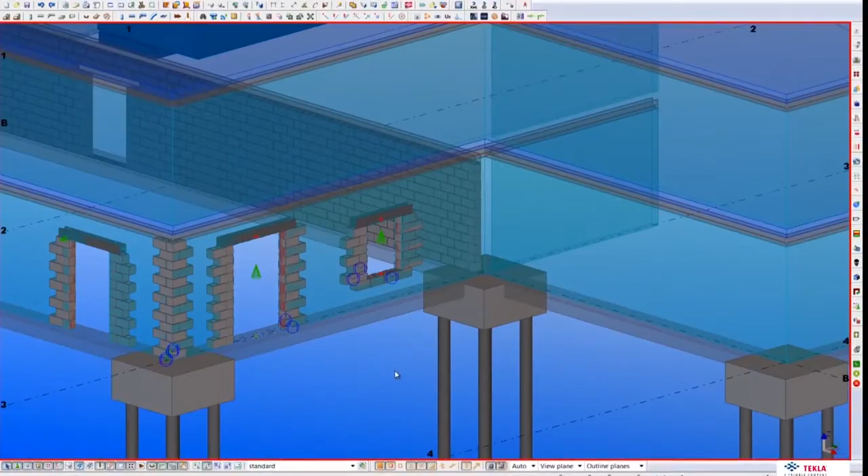What is BIM? BIM's the buzzword that was picked up in around 2003 as the new name for something that would really be innovative in the construction industry. At the beginning of the era of computer-aided design, there was this debate whether we were developing techniques for producing drawings better or producing the model of the object that's being fabricated and implemented.

And it took the construction industry much longer than other industries to make that change to modeling the product rather than modeling drawings, modeling an artificial representation. So it wasn't until about 2003 that the industry as a whole recognized the value of 3D modeling of the object and the building from that object and carrying all the attributes and information of those objects.

They named it BIM. Other industries called it virtual design and construction. It's been going on for 20 years in the aerospace and manufacturing industries. But Autodesk's purchase of Revit gave credibility by the leading CAD vendor that this was a direction for the future, and the adoption has been very fast.

So Chuck has talked to you about the history of building information modeling and how it's taking hold in the structural steel and precast concrete industries. And as you know, we're working with a lot of the masonry industry trade associations and companies in masonry with architects and structural engineers to develop BIM for masonry. And that entails a number of projects that you should be aware of.

The first of these projects is with masonry material suppliers. And one of the huge problems with the masonry industry is that it offers a wide range of products across the clay masonry, concrete masonry, and custom masonry like cast stone and cut stone products. And none of these are represented in a common way. So you can imagine in a BIM system, sometimes we see these objects in BIM systems as simply blobs that don't have any attribute data.

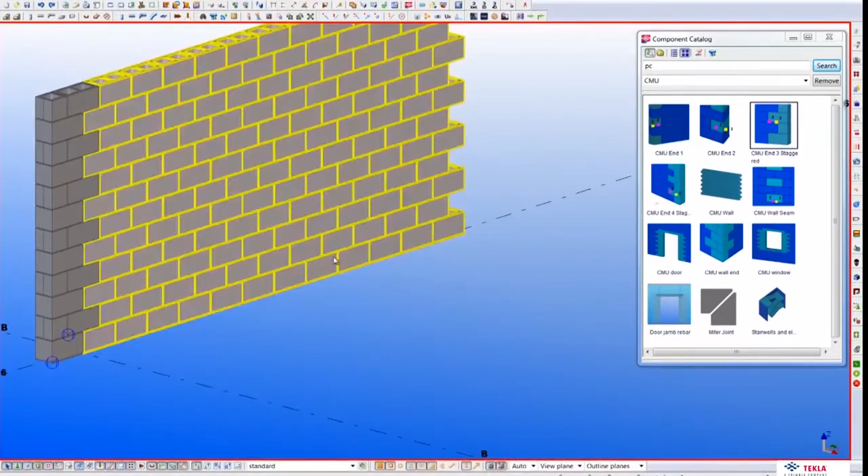So there's no way to query the drawings. There's no way for the models to really understand that there's masonry in these buildings because we don't have a common data infrastructure for the masonry units themselves. So that's our first project for the industry, is to develop this, what we call the masonry unit model database.

The ability to integrate all the different trades and systems into a single integrated model, that's a complicated story, but it's very critical. That's a central thing that contractors do, and it's facing the work in the construction site every day. So coordination, spatial coordination, time coordination,

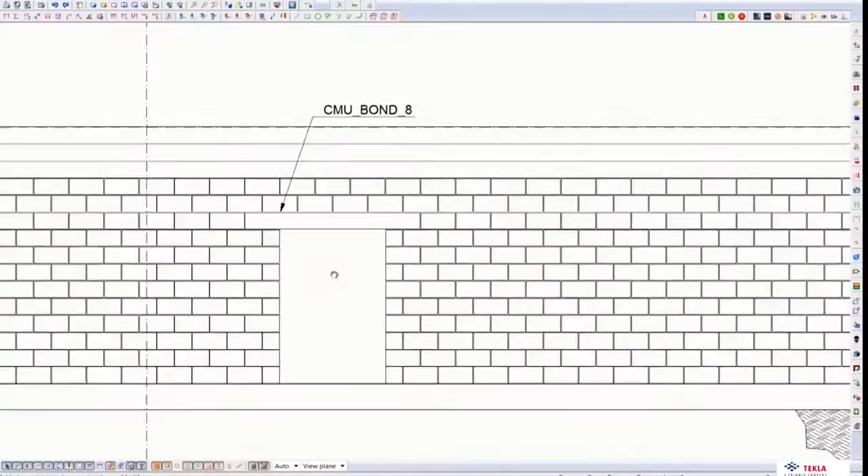tracking materials, material supplies. All of these things are facilitated by building information modeling, and as the rest of the industries move forward on this, then it's really incumbent on all the industries that are coordinating, working together to do that too.

20 years from now, we're going to see a really huge transformation of the construction industry, and especially what happens on a construction site. We're going to see a variety of augmentations for supply line, from deliveries, automation in terms of scheduling and adaptability, new kinds of technologies in terms of materials and how they're placed and formed, so that BIM really facilitates and allows all this to happen.

Part of what we're doing in the BIM for Masonry project is imagining a future state and imagining how software has to get better to get us there. And we really have to be able to represent all aspects of masonry, all of the masonry units, the wall systems, the details, the flow of materials on the job site from the manufacturers through the delivery chain in order to make the future state masonry BIM possible.

And Chuck talked about augmentation and the actual use of BIM on the job site. So you can imagine masons themselves having access to information about where the materials are, perhaps automation in terms of cutting of units, which we know is a difficult activity for masons to accomplish safely with OSHA standards for breathing silicates and things like this.

For a contractor to turn their back on BIM is to not look ahead to the future, because BIM is the future, and with architecture, 3D modeling, it is happening in the field today, and it will be prevalent in the very near future in our industry. And you have to be prepared to utilize the tools that are given us.

When I think about BIM and what the future holds, I'm excited because I'm not sure what all is available. I've utilized BIM on one project in the last 20 years, and what we were able to do with it, and that was when it was in its infancy, was amazing.

I can't imagine what we're going to be able to do 5 years from now with the BIM models, as far as logistics, and as far as assisting us in laying out a building, as far as assisting us in the amount of materials required. I mean, it's really amazing what's going to happen in the future.

I think the most important aspect of the BIM Coalition is giving the architects the tools to design more masonry within those systems. If we don't step up and supply this information to the architects and designers, we're going to sit and watch our industry become passé. We have to be the leader in BIM. We have to give the architects and designers the tools necessary to utilize our superior products.

Well, I think we're at a very interesting stage in the construction industry. I think the combination of digital, technological, and economic change is coming at us all at the same time, and it's very important that we raise the level of performance of both our employers, contractors, and our members, everybody involved in the industry, and take it all to a whole other level.

Well, I think if we leave it to architects and engineers and owners to design the whole process, and we don't engage in it, we won't get what we need out of the process. It's important that we raise our game, develop our own versions of BIM to interact with the other players in the construction industry, so as we can get to market at the same time or ahead of everybody else and lead the masonry process, instead of having other factors in the construction industry lead us around or exclude us, as the case may be.

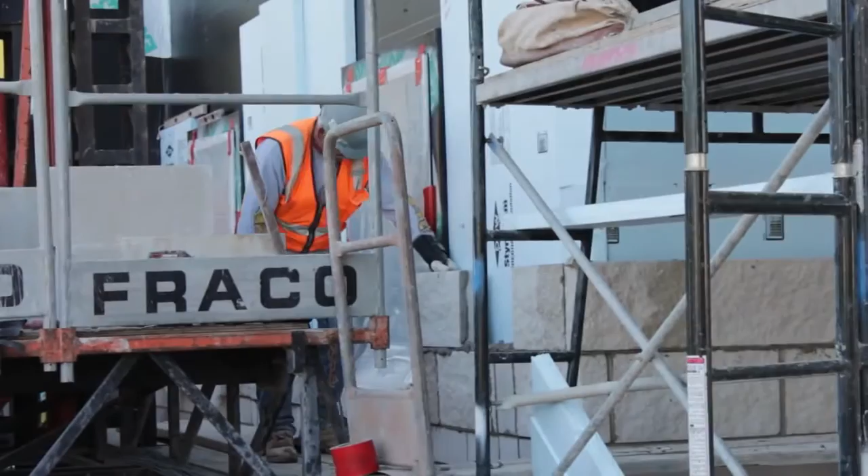Well, when I was a young bricklayer, I used to say to watch good bricklayers work for a good masonry contractor was like poetry in motion. I would like us to be able to continue at that level, and when we've gone through this process, people can believe it's a joy to take us to a work site because we're so good at what we do.

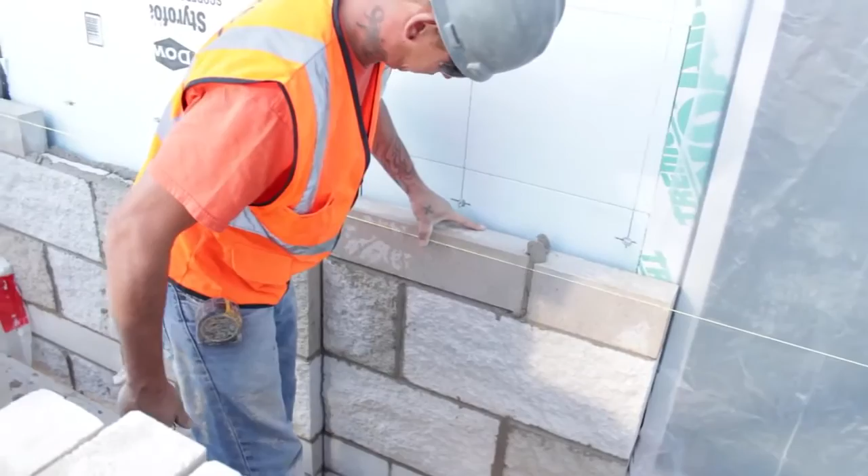Well, it's very important that we get in this game, because it's up to us to take care of our sector of the business. Nobody's going to spoon feed us or walk us around by the hand. We got to get out there, educate ourselves, and promote our own facets of the industry. It's not something somebody else is going to do for us, and if we don't do that, we're just going to be left out of the picture altogether. We need you, our masonry contractors, to get involved and help us lead this effort, so as people look to masonry when they want building solutions.

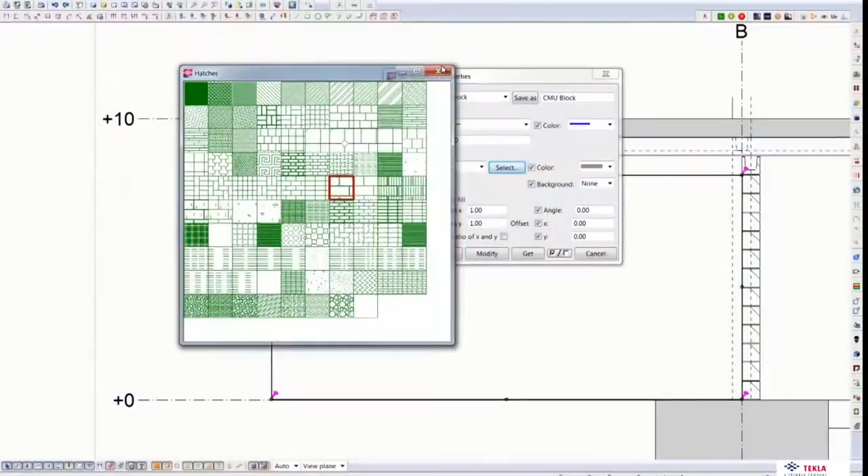What this initiative will do for masonry contractors will allow them to engage in the BIM process for the first time. We hope to have a better product that will allow them to do estimating, scheduling, and increase their productivity in construction. We anticipate that this is going to change the way they work. It's going to allow them to build with better confidence, give them access to real-time information, and 3D models that will allow them to understand exactly what they're building when they need it. It'll take a lot of the guesswork out of the plans and spec approach that we're currently in.

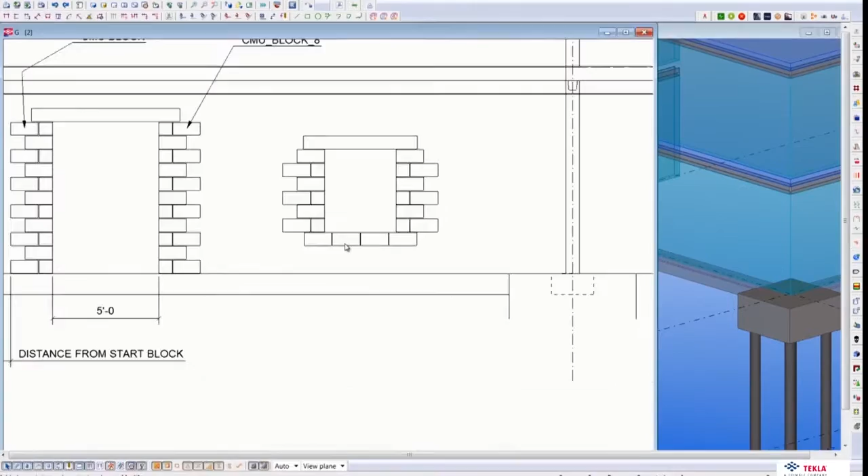We're bringing a new work method or a new work approach to getting information in their hands. We're attempting to get them model-specific information about the brick, about the mortar, about the method in which they need to install it. And we're hoping that the BIM for Masonry will be that new avenue to develop the software to allow them to do that.

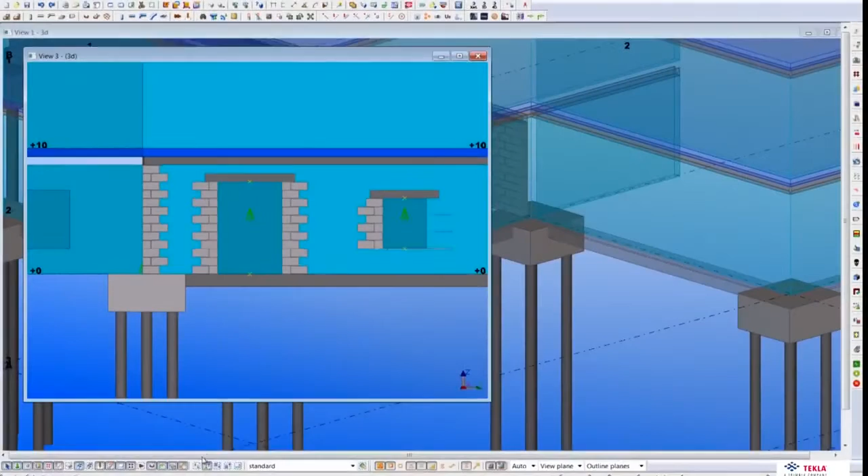It's like everything that you see on the job site in the physical sense is also there in a digital sense before the job starts, and not just the geometric information. Who supplied the materials? Has the material been ordered yet? When is it supposed to arrive on the job site? Who's responsible for its installation? How much overage of material has been ordered in case some is damaged in shipment? All of those details should be made available through the building information model so that it can be queried.

And so really, it's all of the applications of BIM that you see, all of the interesting graphics, all of the takeoffs, cost estimating, but the building information model itself is underlying that. It's the data underneath it, structured in a way that is relevant to the stakeholders of the project.

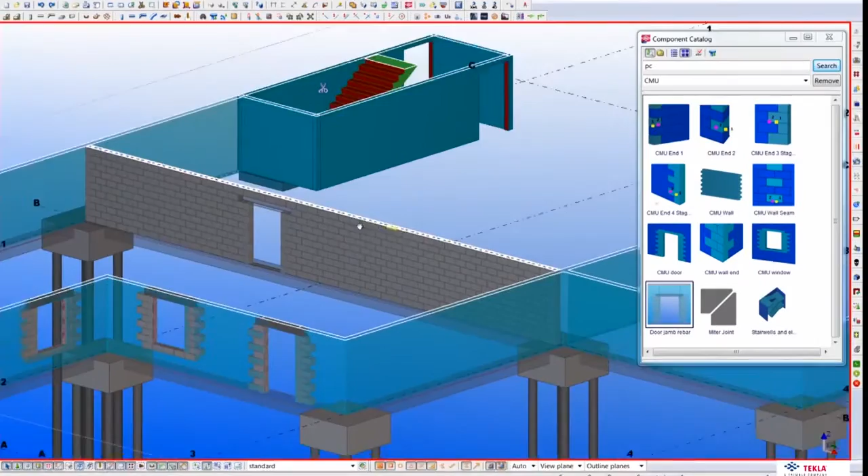Well, I think owners are very interested in having a long-term record of this huge asset that they've just invested in. So think about it as the owner's manual for your car, because every building is different. Every building has a different owner's manual. And so part of the BIM model is having an electronic data record of the thing that they've just purchased for $100 million. So that's really powerful.

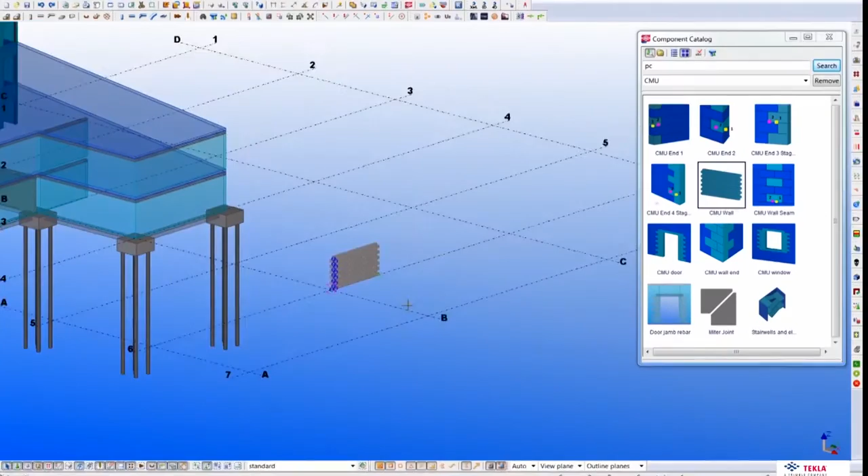So in terms of facilities planning and maintenance, that BIM model can be maintained and updated over the life of the building to provide a record of what the owner actually has. For the architect, the BIM model is really the method of delivery. You're certainly aware of the traditional plans and specifications that an architect delivers to a building owner that becomes the bid set for procuring a building.

But we think that in the future, the architect is going to deliver a BIM model, which is a complete description of the building as the architect envisions it, and that is going to become the contractual deliverable of the architect. So the architect is building that model, and the model has sufficient information so that if you want that view of the side of the building, or the plan view, or the roof plan, or a section at a certain point, that's a queryable thing that you can just pull out of the BIM model when you need it.

And so those traditional drawings, if you will, are really extant in the BIM model. They exist, but they're there when you need them, if you need them, and along with many other views of the building, which in the traditional delivery process, the architect might not have produced. So it's a more complete description of the building that the architect is delivering through BIM.

At the bottom line, the mason's job is to put block and brick into the wall. And for that thing to happen, first the materials have to be there. They have to be the right materials. Perhaps they need to be cut in certain ways. Perhaps there are other accessories that have to go into the wall beforehand, such as Dur-O-Wal, ties, air barriers. And so BIM becomes on the job site a way of tracking all of that material. Where is it? When was it delivered? And making sure that the material that the mason needs is where he needs it, when he needs it.